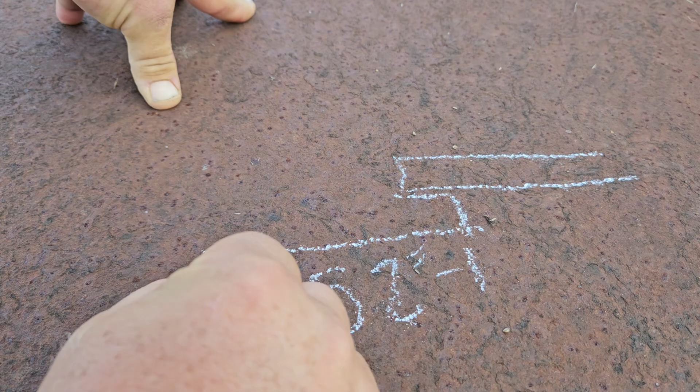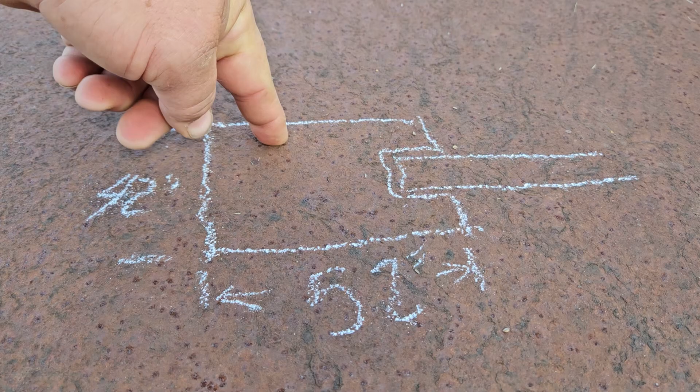All right. There'll be a 10-inch notch. This little leg here will be 10 inches. It'll be the width of the beam, a little better than the width of the beam. So that's what we'll have. This is going to be 42 inches, if that makes sense, from here to here. Why? I can reach from here to this corner about right here with just my hands without a pickaroon or a hook of any sort.

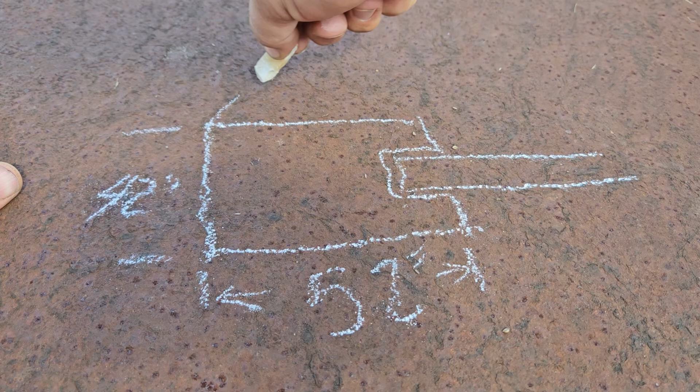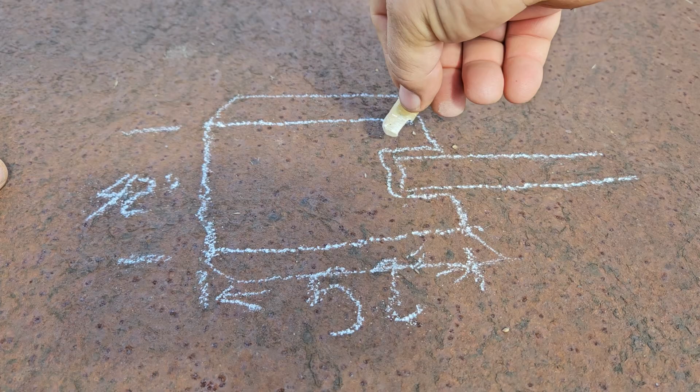So that's my thinking. There'll also be some angled up pieces or wings or whatever you want to call it, trough or guides or whatever. They'll be about 6 inches. Now for the pivot point, I have some tabs that I'm welding on the very end of the beam. And I'm going to sort of box it in with some steel. You'll see what I'm doing here in a minute.

Uh-oh, I think we have a visitor. Who do we have right there? Are we interrupting something, Mr. Mantis? Anyway, back to the project at hand. You can watch.

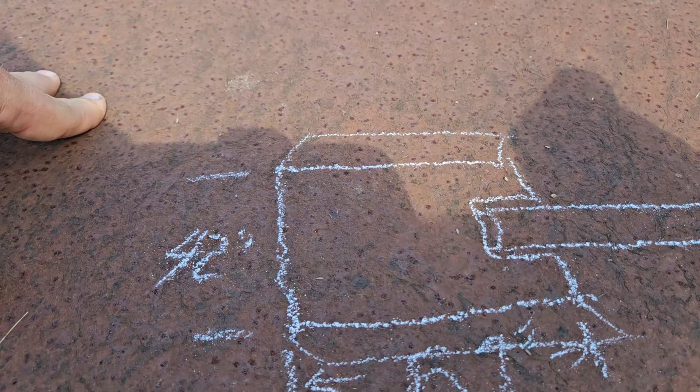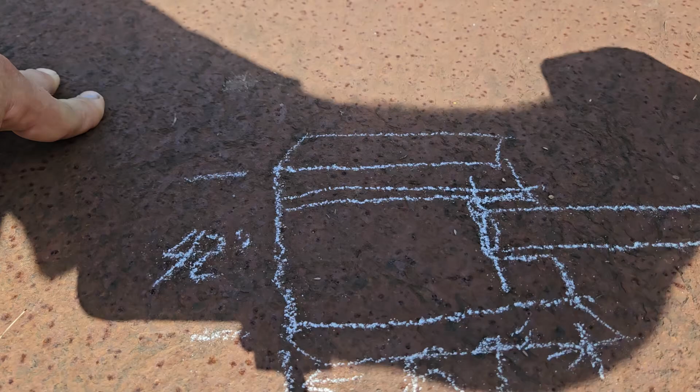I'm going to have 2-inch box tubing, 1/4-inch wall. Sorry, that's not very straight. I'm gonna have a 1-inch pin going through there, and well, we'll get into this a little bit more, but that's kind of the plan. You'll see it as it comes along. The shading couldn't be any worse, could it? So that's kind of what we're gonna have as far as the push-off table. This steel right here is also going to serve as the surface for the log lift as well.

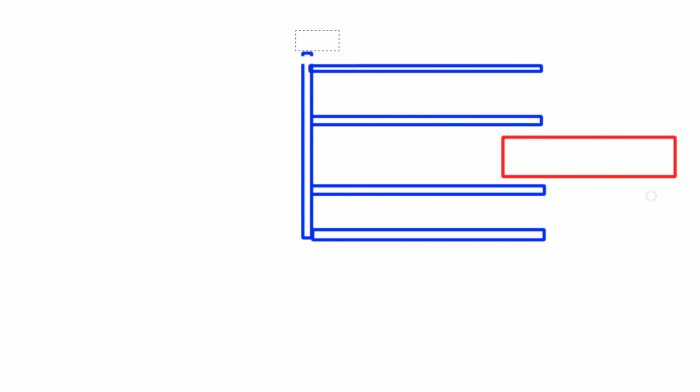The first guy I had lined up to do the sandblasting, his preference was to have everything individual, no weldments, like complete, other than the beam. So when he couldn't do it, and I found this other guy, he had a preference of having everything welded together. Well, I knew that wasn't going to happen. When I got back home, I went ahead and welded everything together, so I didn't get a lot of video of anything. So I'm just showing a quick schematic of the skeleton of the push-off table. The outside pieces, the blue, those are 1.5 inches.

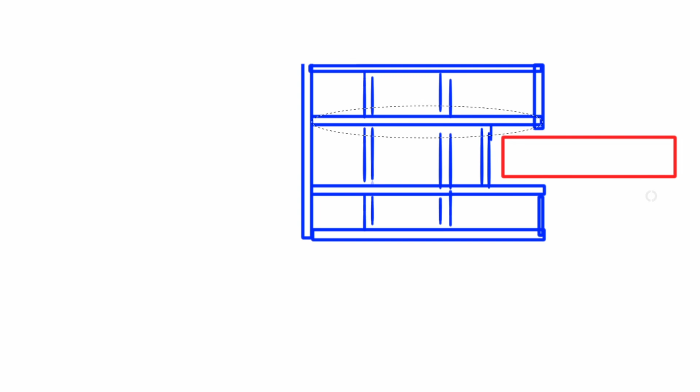The main ones that are coming down alongside of the red beam, the beam is represented in red, those are 2-inch. And I put some cross supports and one right in front of the beam. It's a pretty stout table, probably a little overbuilt, but I don't want it to bend. These tubes right here are 2-inch, 1/4-inch wall with a pass-through hole that accepts a pivot pin, and that's represented by that green right there. And we'll just do a quick side view here to show you how it's supposed to work.

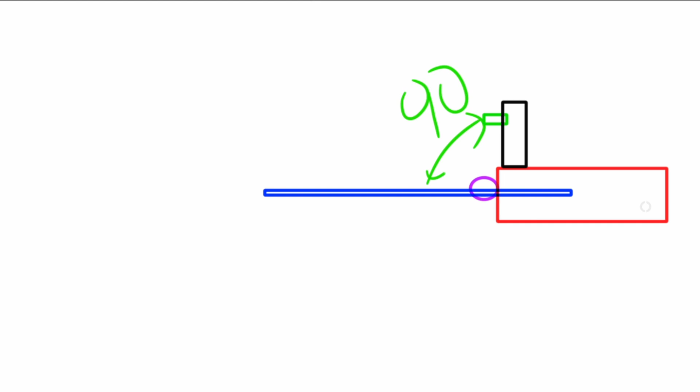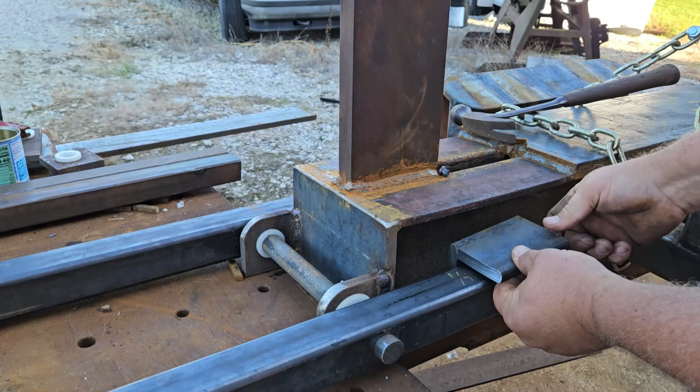The green little nub coming off of the black vertical support for the wedge, that is actually a Category 1 lift arm, like an implement, and that's what the table will be pinned to for transport. These are going to be the stops, and they'll be welded right on the side of the beam, and that's how we'll get everything lined up and make sure it's nice and level. That's the plan. And then I'm going to probably drill a hole here, weld a nut on, and that way we can adjust the height. Maybe. I might try that. I don't know if that'll work or not. So that'll be our stop.

That'll make everything level. And we're going to come out 21 inches from the center. There'll also be wings. And we'll do it on both sides. And we're making it 52 inches long, or 42 from the pivot point. The reason I'm making it longer than I am wide is to be able to reach across if I need to. This is the whole amputee thing, to make it a little easier. I'd like to stack up a bunch of wood on the end of the push-off table and then put it into a tote. If I ever get a conveyor, it'll make life that much easier, but until then, I want to have a mass of wood down there, so I only have to walk a couple times to fill a tote.

All right, let's give this a try. I'm going to try cutting some 3/16 rusty steel with the plasma, the Cut 50, and we'll see how it works. Probably catch this pallet on fire.

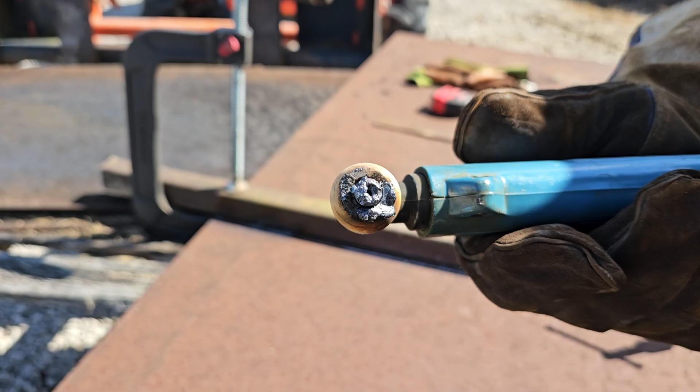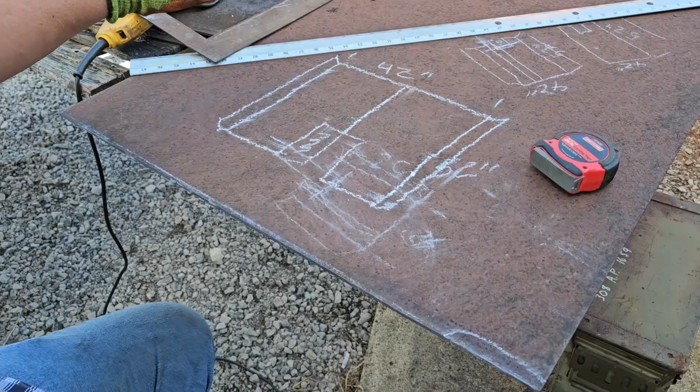This piece is not wide enough for the 42 inch. This is only 29 inches. So what the plan is, there's a little bit of a defect here where I cut too deep. So it kind of goes like that, exaggerated. That is actually going to fall into the notched area of this tray. The tray is going to be 42 inches.

This piece is 29. I'm going to cut 8 inches off of it, and that'll become the edge, or the side, the flare, whatever you want to call it, the edge of the tray. So I'm going to cut that, and then I'll weld that back on. This part right here, the defect, is going to fall in the waste area. So I'm not worried about that.

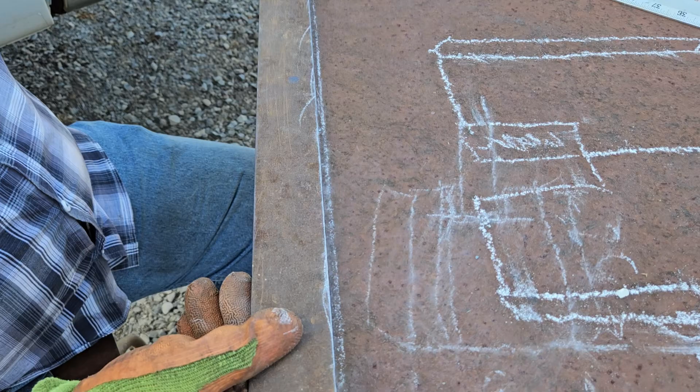The rest of this is pretty dang square off the previous sheared edge. I mean, it's close enough. This is just a push-off tray, right? So I'm pretty happy with that. I can see there's a few high spots, but I'm not going to worry about it. This is good enough.

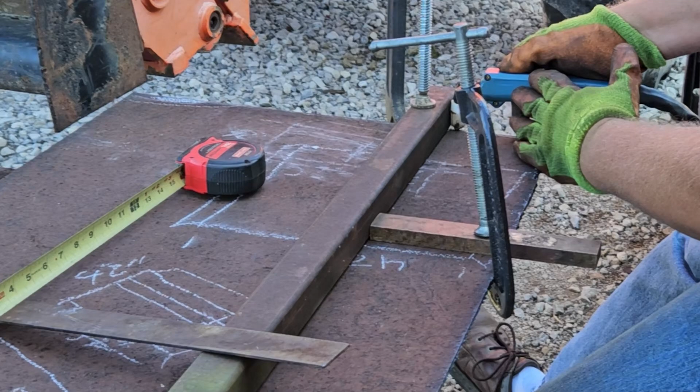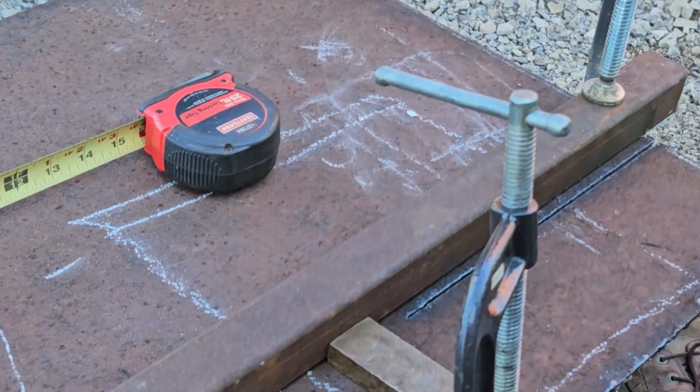Yeah, it's still cutting pretty decent. Tip doesn't look terrible. Should have put welding gloves on. Didn't even think about that.

I said that was good. It ain't cutting very good right now. I'm gonna have to switch tips. Here we go, fresh tip. See how this works.

You know why it's not cutting? I got steel behind there. That ain't no good. I was cutting through 2 pieces of steel. Oh well. You'll have that on these bigger jobs.

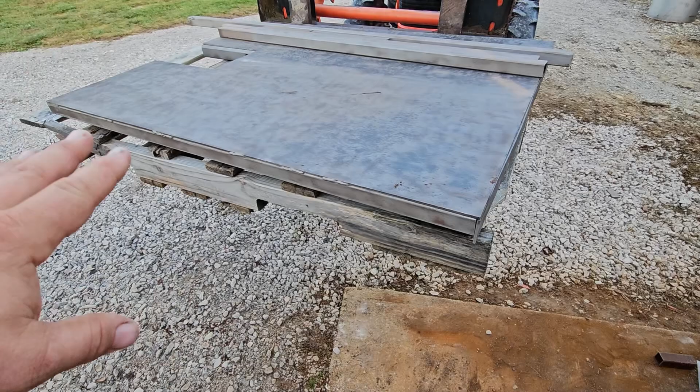This whole push-off table was a mad dash to try to get it done, to get it to blasting. The guy I originally planned on having sandblast all the parts and prime them didn't pull through, so I found another guy. The guy I initially had wanted all these parts separate, like these guys right here. And these are also the sides for the trough.

He wanted everything separate. When he stood me up, I went and talked to the other guy, and he said, oh, I'd like them all as one weldment. You know, it's easier for me. I'm like, oh, great. So I had a lot going on that day. I got home and worked on this. Got it pretty much welded together.

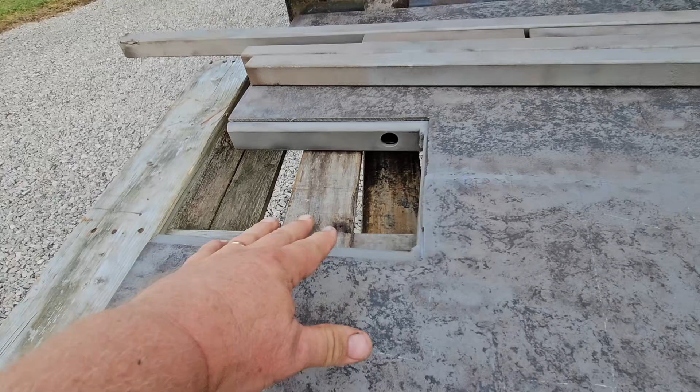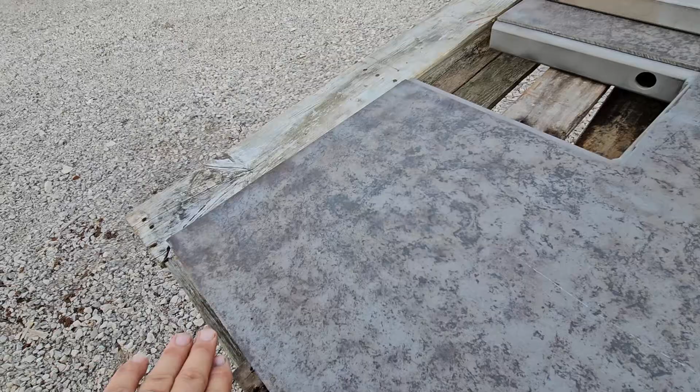I can show you some of the features it has. Here's the pivot pin hole right there. This is the slot for around the beam. And these are just miscellaneous parts that are going to go on the side, for the wings that come out, the trough. They're going to come out at about a 45-degree angle.

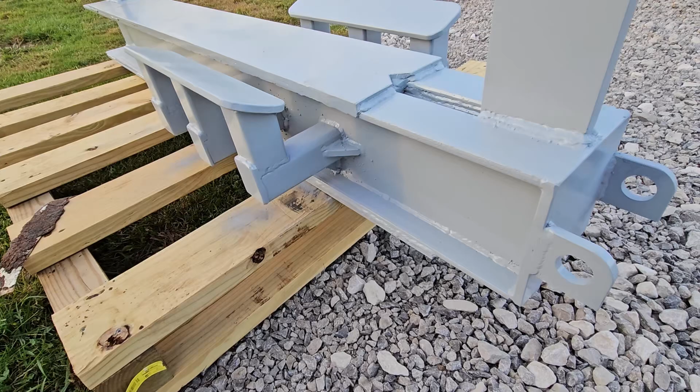Am I happy with the way the beam came out? It's so-so. I asked if he could get most of the spatter off, and I'm going to end up chipping this stuff off because he said, oh, I'll get 90% of it. And it's nowhere near 90%. I don't know if you can see. I'll get you a little closer here.

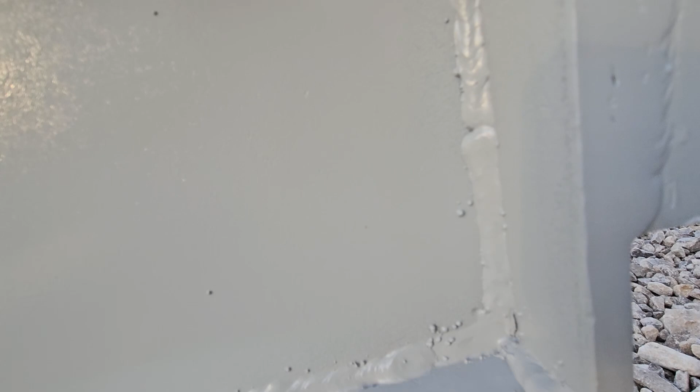There's quite a bit of spatter there, but yeah, we'll chip that off, and I have some touch-up primer. It's black, but it'll work, and we'll get those taken care of so I have a decently smooth beam, somewhat smooth. This is the wedge pocket, the wedge support. There's some spatter there, so we got it primed, and it can sit outside now and I won't feel too bad. We have some rain weather coming.

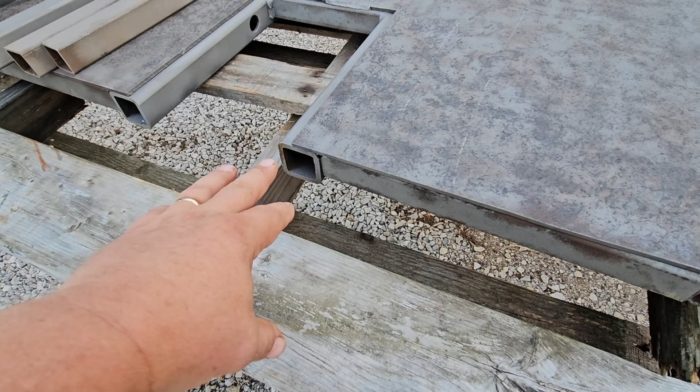So the big push now is to get this guy in primer. I've got the caps made up for the 1.5 by 1/8 inch walled tubing. And then these are the main longitudinals. They're 2 inch with 1/4 inch wall. And they run the length, obviously. I had to put a seam in this because I didn't have one sheet wide enough that I felt comfortable using.

These parts over here, like I said a minute ago, are going to be for the 45-degree wings to make a trough on this table kind of thing. So stuff doesn't roll off, that's all.

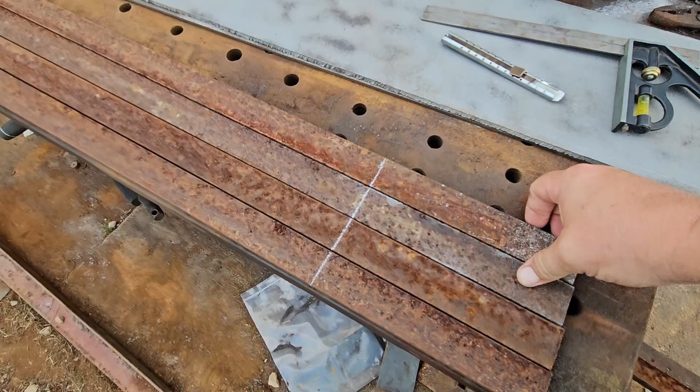Next, I'm going to use 3/8 inch bar stock. The plan is I'm going to bend them, soak them in muriatic so I can fit them in. These are going to be, what, 26 inches long at that point, with a 9-inch kicker on it, and I'll cut to fit. That's my plan.

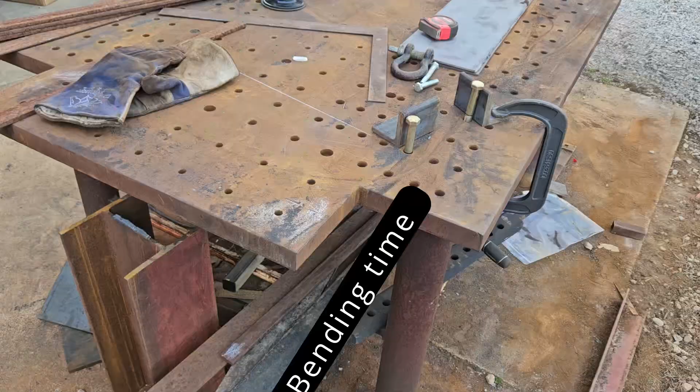Why am I bending it first before I put it in muriatic acid? Because this thing won't fit in at 36 inches, and that's what I cut them to. They're a little long. There'll be a support. This is all backwards, I know. There'll be a support here. There'll be a support here. And, all right, I'm not sure where the other camera cut out.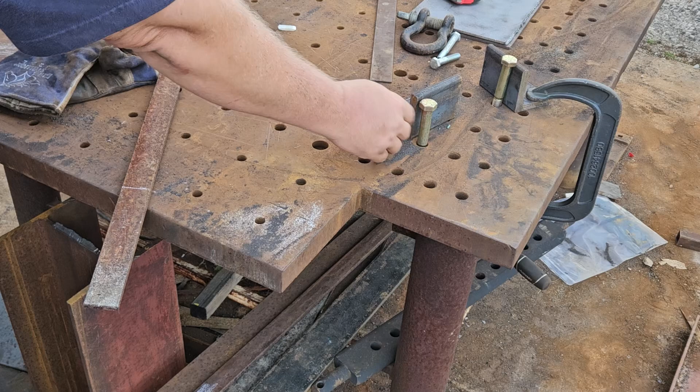All right, we're gonna heat these up with a torch. Right on the line, I don't know if that shows up very good over here. I got my makeshift bending fixture. All that piece of angle here is to hold that bolt up. It wants to drop through that hole. So it's just there to support it while I stick this piece in. That's the stop over there.

We're going to heat it up on this mark. That's not the actual bend line. That's just a reference mark for heat. We're going to put it in here. I'll start once it's hot, and I'm going to bend it to this line right here. That should be close to 90 degrees. That's the plan. We'll see how it works.

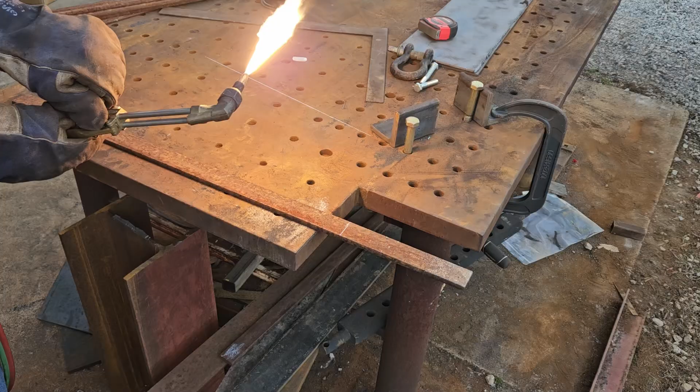They're good and red. A rosebud worked great for this. I just don't feel like switching it over. Yeah, we got her good and red. She ought to bend pretty easy. Let's see what we got.

That might be a little beyond. That's okay, we can straighten that out. Let's see what we got here. Stand it up, maybe you can see better that way. Yeah, we'll have to open her up a little bit. Well, let's get the other ones bent. I'll try to overbend them first, and then we can straighten them just by clamping them to this table and giving them a little push.

This table is 1.5 inch steel plate. It's like 8 feet by 5 feet. Thing weighs, I don't know, like 1,600 pounds. It's super heavy. You can pretty much do whatever you want. Anything that a farmer would need to do, you can do on this table. I think it was a bolster plate out of some press somewhere. Yeah, see how strong these vise grip clamp things are.

I think that felt like it moved. Not enough. All right, we're gonna have to heat these up to tweak them a little. Oops. Shut the wrong thing off first. There we go, let's try that. I think that's gonna be close. Money. That's money.

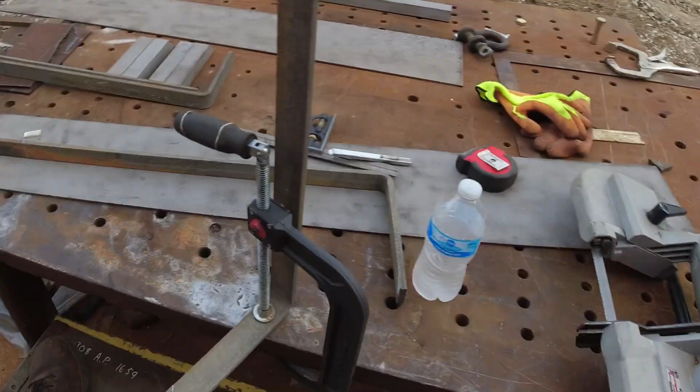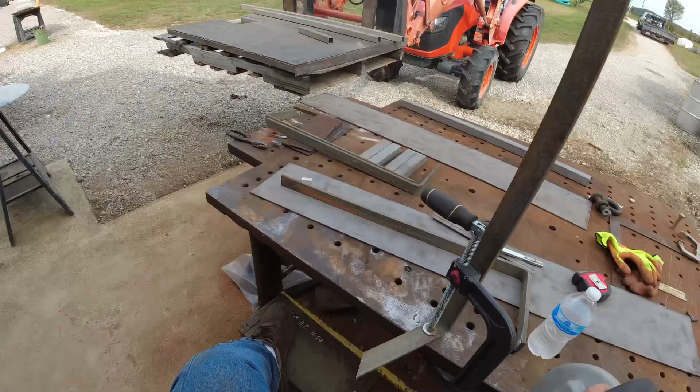So that's kind of what I'm going for right there. This is gonna be the subframe, and it's gonna get welded right here. Of course, it's gonna be at an angle, but it'll be flush with the end piece here. Let's try that. Yeah, I'm gonna nick this off so I don't get cut. Or impaled anyway.

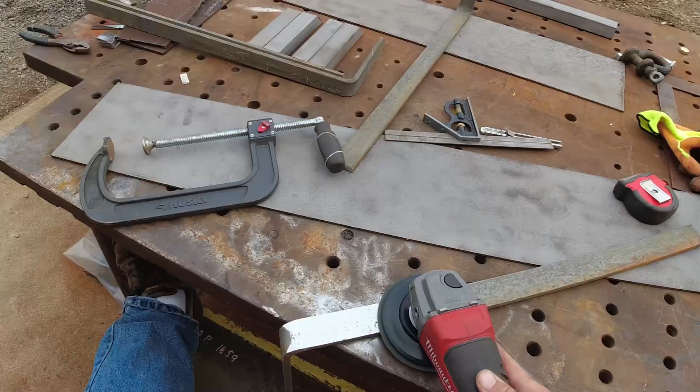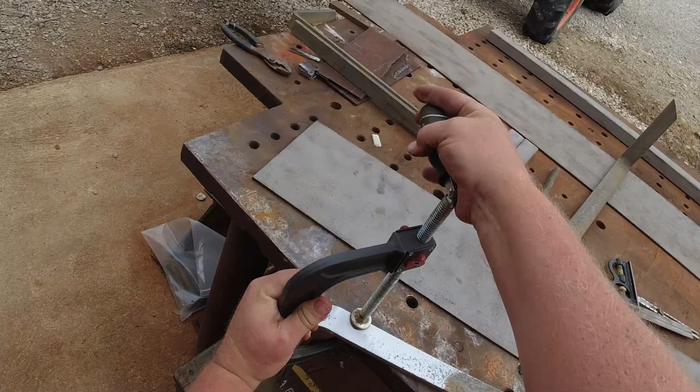Oh yeah, I'm kind of liking that. We're just gonna hit this all real quick. Well, I got a place to clamp to now. I don't know how long those pads are gonna last, but so far I'm liking what I'm seeing. These are the Hercules pads that come in like a 4-pack or a 5-pack or something like that. So yeah, I'm liking those so far. I know it's gonna be hot. I'm just trying to feel for sharpness, and that feels pretty good.

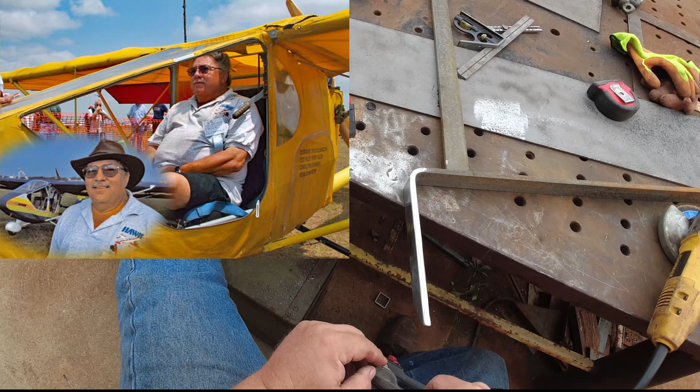Chuck Slusarchuk, the guy that designed the CGS Hawk, I helped him out and worked with him for a few years. He always taught me that you wanted to be able to lick any edge that you put onto an airplane. Any part that has a sharp edge, you don't want. You want to be able to lick it with your tongue. You don't have to actually lick it, but that's the consistency that you wanted. He wanted it very, very smooth and no burrs. So that's where we're at. Actually, I got a little burr on that backside. There's one.

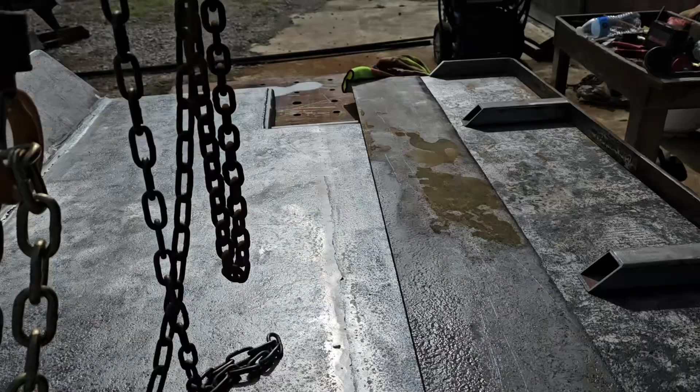One and done. Now I'm sure 3M sells a version of this, and I am super curious how well they work, because man, this thing is pretty phenomenal. Really impressed. Believe me, I did my fair share of grinding on this project so far, trying to get mill scale off and paint and all this other fun stuff. This works best by far. Not sure how much, if anything, I got on the last on this wing here.

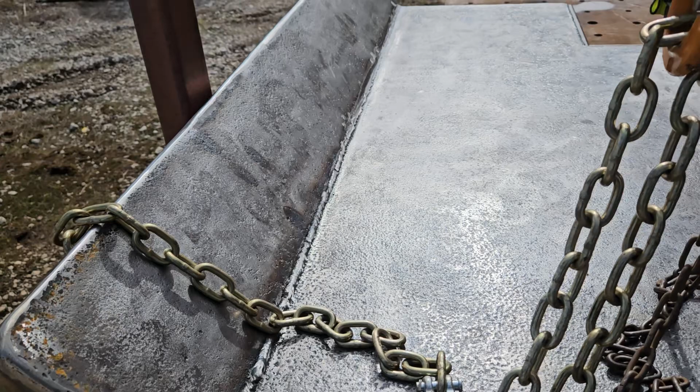Before my battery was all puked out, I didn't notice that, but that's what I have. That's what the end product looks like. Weld on this side was a little sketchy. I ran out of gas, I ran out of wire. It was just a real goat rodeo. I tried doing it with some stick, and that didn't turn out so good, hence the grinds down there.

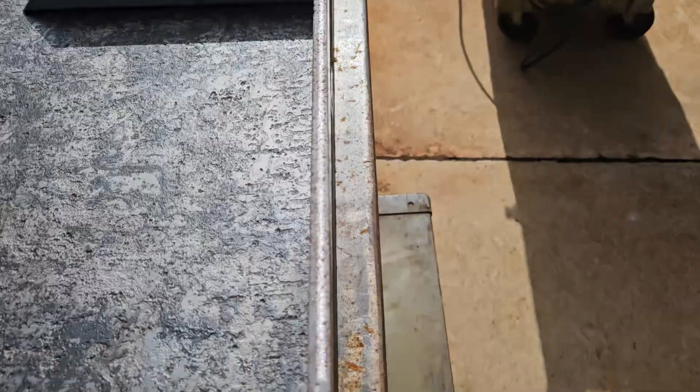But that's kind of what I'm looking for. A nice radius on this end. This is the discharge end. Up there is the notch where the beam will be. And here's the way I'm putting this together. I don't know if you can see, it's pretty much 90 degrees. Yeah, I can flex it a little bit.

But once this is tacked together, I'm gonna go ahead and tack it to the frame, or the tray, the bottom of the tray, kind of at a 45-degree angle. If that shows up like that, I don't know. And then we're cladding it, just like that side, with this piece. And I'll put the plasma cut side down.

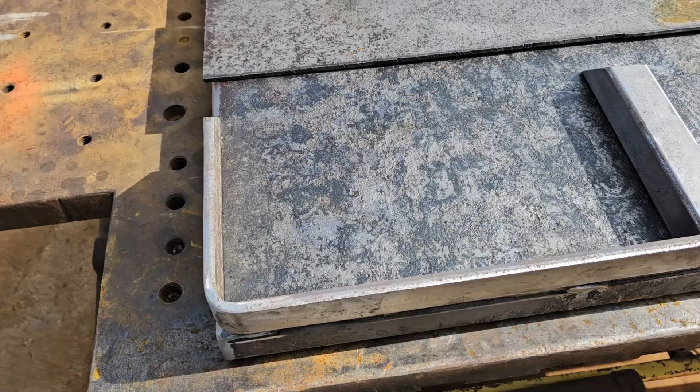I'm not very good at bending exactly 90 degrees where I need it to be. So what I did is I bent two pieces, and I have a seam right here in the middle. And I'll crank the amperage, grind out a bevel on this, burn that in, and I'll do that after everything's kind of tacked in. I'll just kind of grind that with a cutoff wheel.

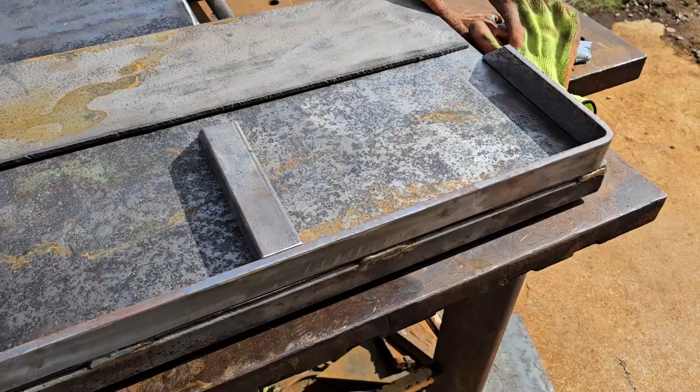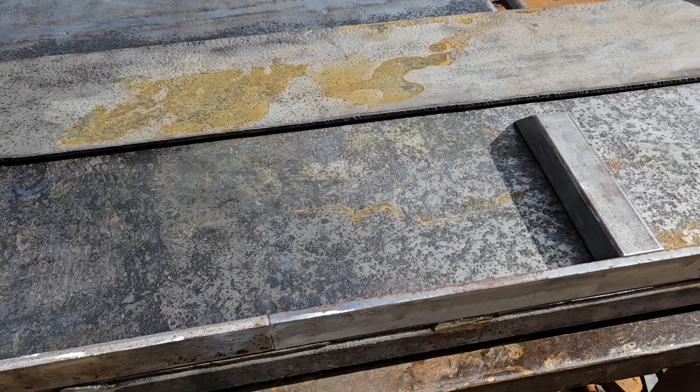That'll be the table, and I'm telling you, this thing is probably a little heavier than it should be. Was 3/16 plate right there. Right here. That was 3/16 before it rusted and it got sanded on and that kind of stuff. So it's probably just under 3/16. Pretty heavy.

I've got one of these, if you can see it down there in the cart. It's a surface conditioner. Man, I've been buying some Harbor Freight stuff, only because it's so cost effective. I picked up that surface finisher. After I had this blasted, I didn't get it painted right away, and I got some rust on it. That thing strips it super fast. Super easy. It's a non-issue.

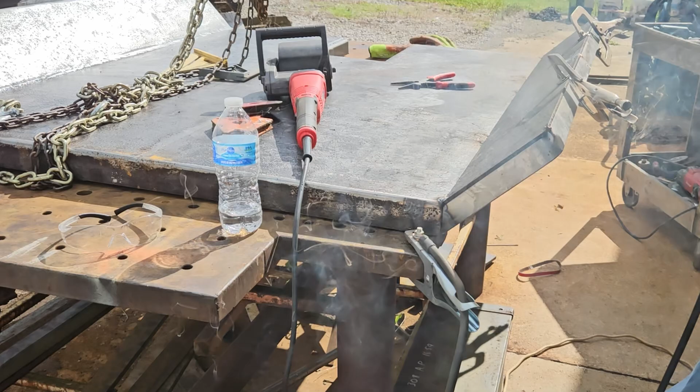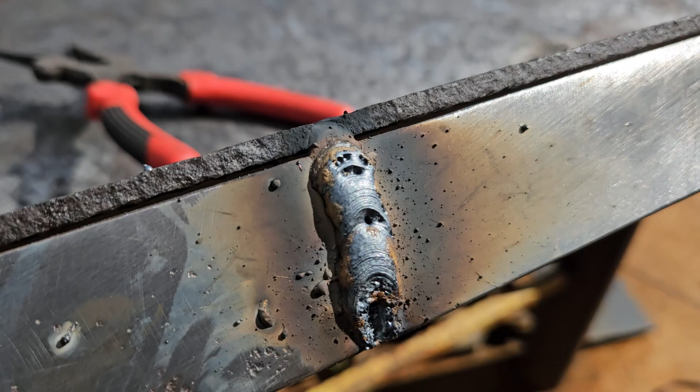All right, I'm gonna show you this. I don't know if you can tell, see some leaves blowing off the trees. The trees are blowing pretty good. Getting some major porosity. I'm gonna grind this back out and hit it with a stick. Probably 6010, I think. Nice thing about switching this over to stick, right here's the lead for stick.

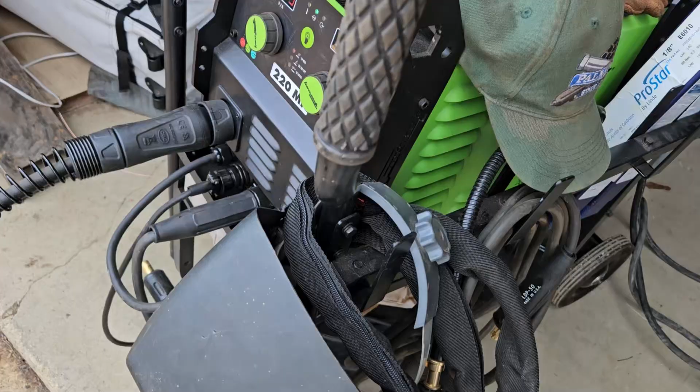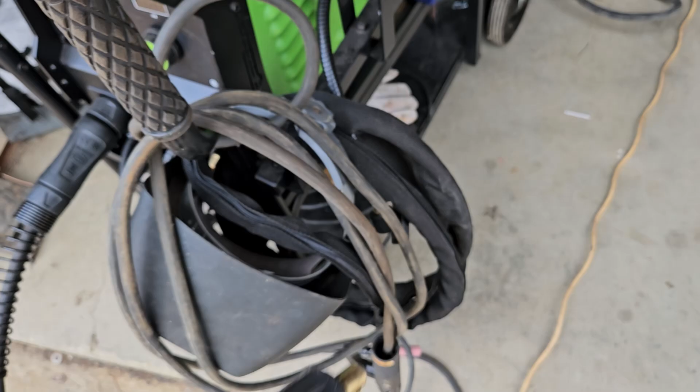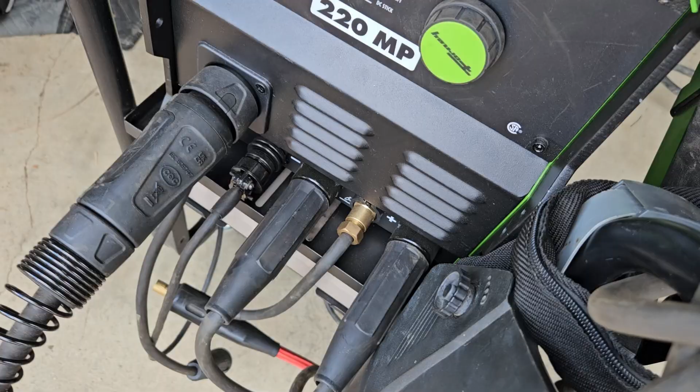We are going to disconnect the positive lead for the MIG lead. I'm gonna switch it to stick. It is hard doing this left-handed or one-handed. Plus I got this hood there in the way, so that doesn't help. All right, lock her in. Positive work clamp, or negative work clamp, positive stick. And yes, this is 6010.

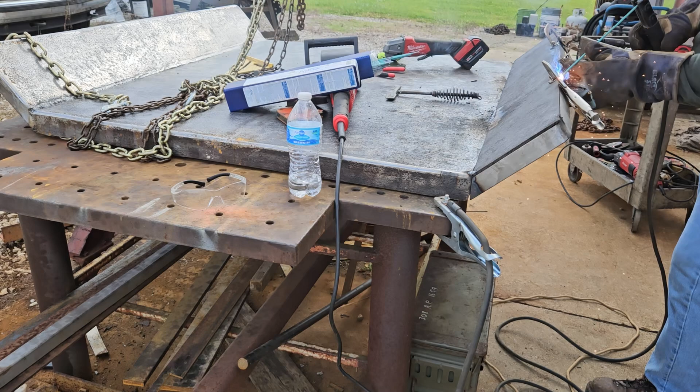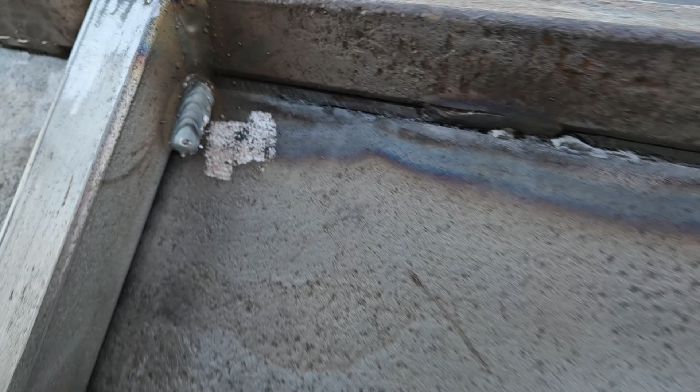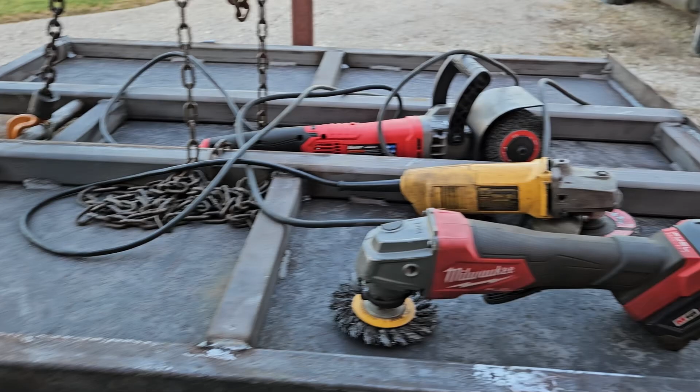Some of the welds are pretty decent. A lot of spatter on stuff. That's gonna show up in the paint. And then look at this thing here. It's just, I don't know, it's so windy. So like I say, some of the welds are decent, and some of them, not so. But that is the push-off table. And believe me, I got a lot of use out of those things right there.

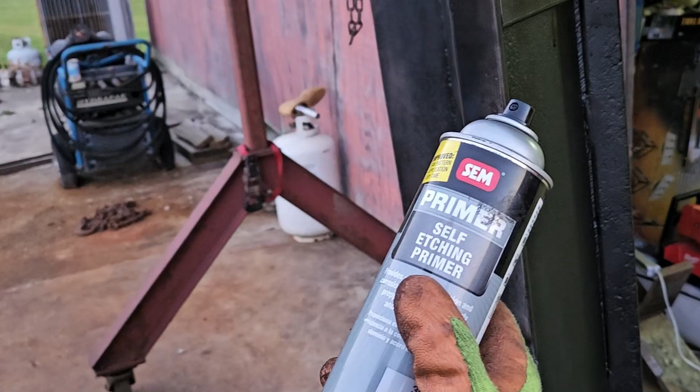I think I'm done welding. And I'll tell you what, welding this thing has been a battle. Running out of gas, running out of wire, wind, and it's just been kind of a nightmare. Got it welded up. We're gonna wipe it down with acetone and hose it down, and we're gonna move on to the next part. Hitting it with some primer. This stuff better be good. It is not the cheapest stuff in the world.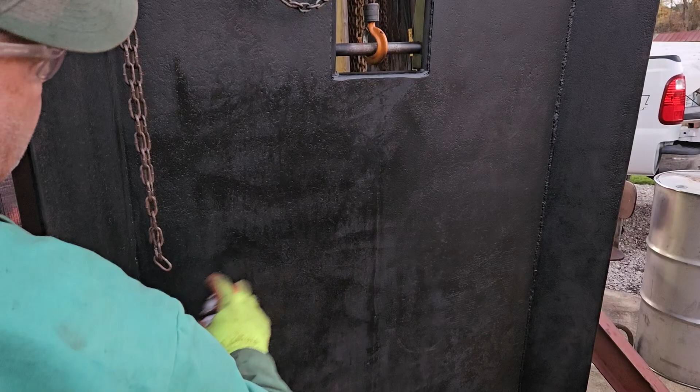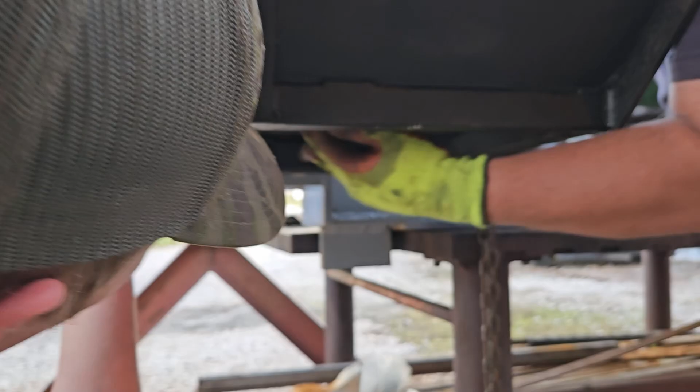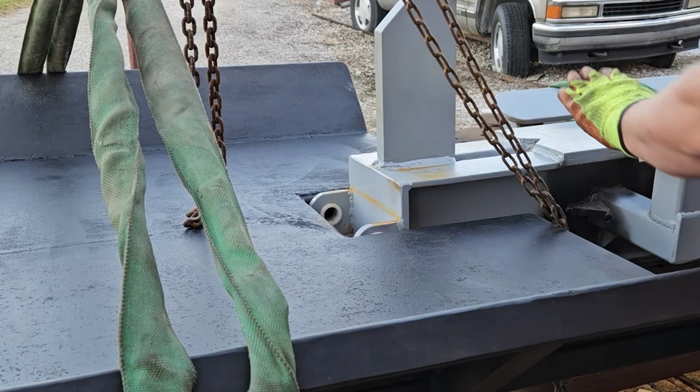Clear. Just keep it from banging into this stuff. Gotta go up just a little bit. Small hammer, just a tap. What we need to do is figure out where this is level with the beam, and I'm going to weld my mark for my stops.

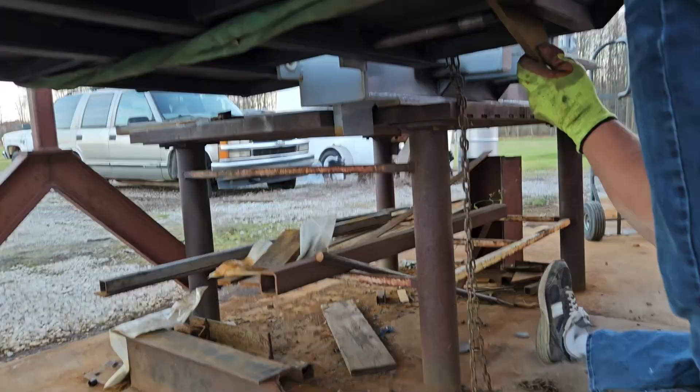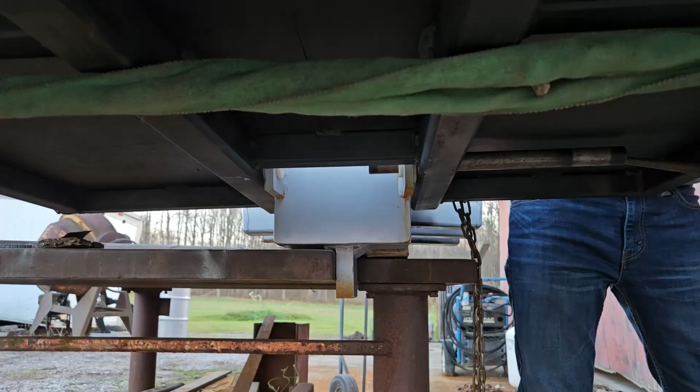Ooh, this is a miscalculation. I'm going to shorten this pin up. It doesn't need to be this long. I just figured it'd go in easier. Now that we're here, we're kind of committed. Gonna machine a bushing, but I think I'm peening this thing over enough. I think we're gonna be good. Oh, slow boat to China here.

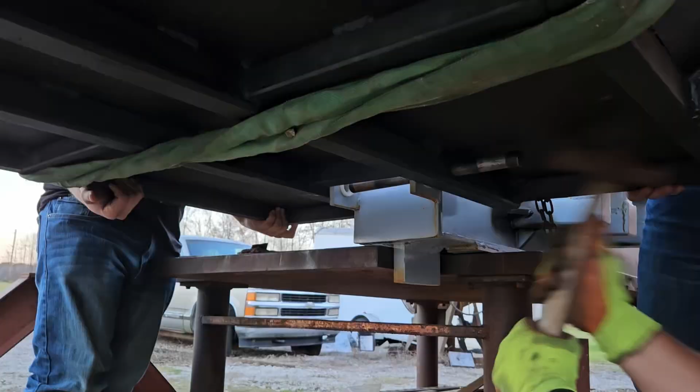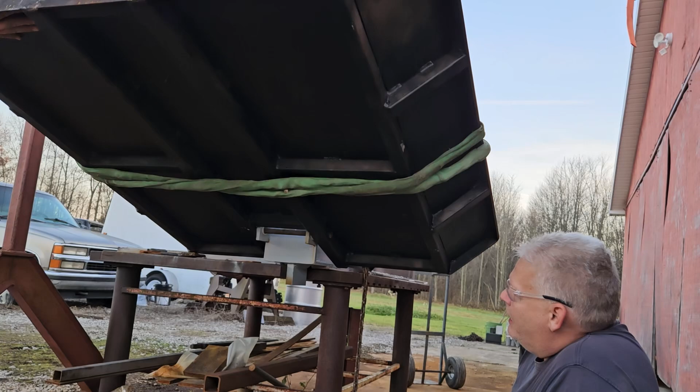Bend. Just like that. It'll fold all the way up, and we'll have a pin in the dorsal fin that'll poke through the bottom, and that's what'll hold it in place. That's the plan.